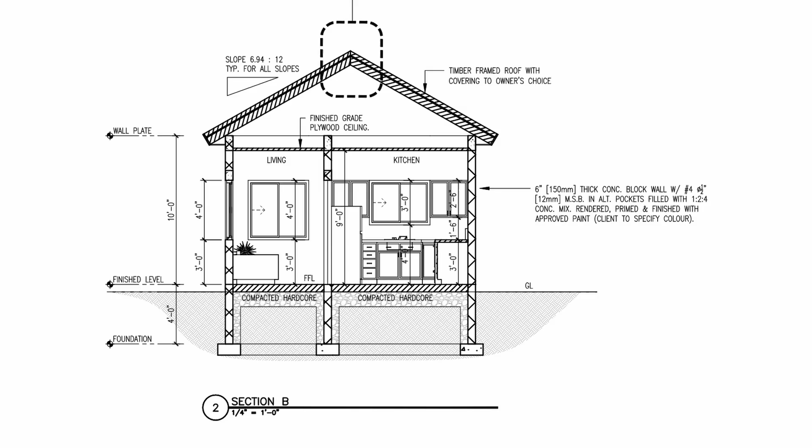So the first step involves developing your visualization and spatial reasoning skills. When you look at drawings like these, it is crucial to be able to read and interpret these documents. Not only that, but also to understand the drafting standards that make the drawings look the way that they do.

These kinds of drawings follow standards that ensure anyone in the industry, no matter where they are in the world, can read them correctly. And so understanding what you see, for example, the relationship between 2D and 3D drawings, the various symbols and annotations, etc., is essential.

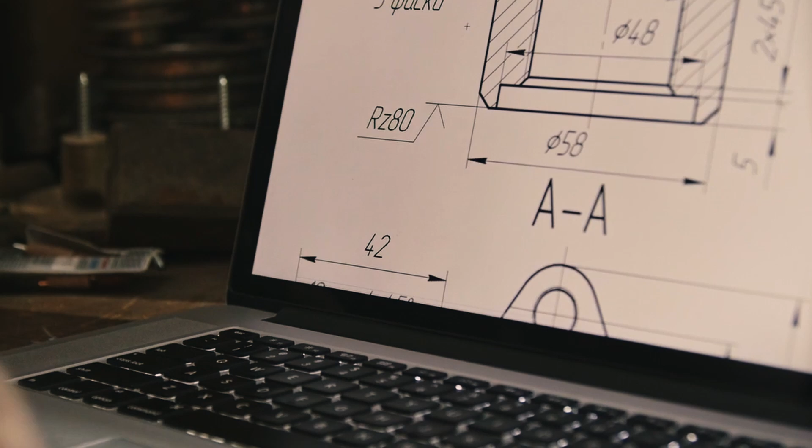Without these fundamental skills, it is difficult to create or even reproduce technical drawings accurately. These skills will help you to translate architectural concepts into precise, accurate CAD drawings.

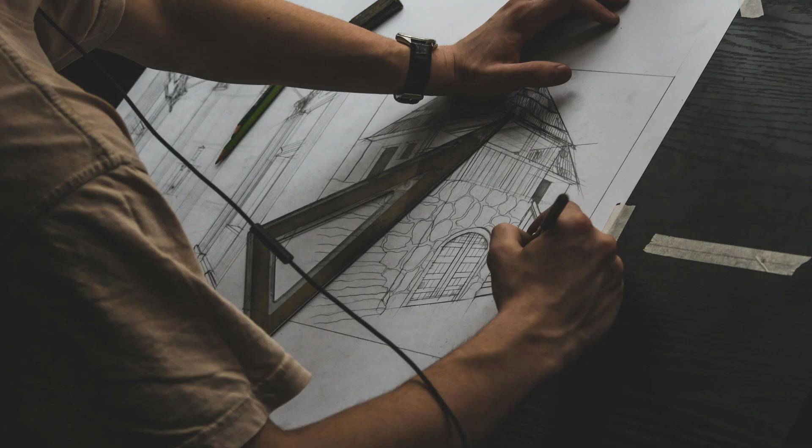Speaking of CAD, CAD stands for Computer Aided Design. Just a few decades ago, we would all be using manual tools to do all of our drafting and designs. However, today there are tons of CAD applications on the market, and these have become our primary tools.

And so mastering the basics is non-negotiable. You must start with a CAD application by learning the user interface, navigation tools, how to move around, how to initiate a project, set up units, and also ensure that coordinate systems are properly configured.

All of these fundamental skills might seem simple, but they are the building blocks of every drawing that you create. And no, the first step isn't tackling the advanced stuff like external references, links, or sheet set managers. Those things are fairly advanced or complex.

However, if I could start over, I would focus on mastering the core drawing modification techniques first. So we're talking about lines, arcs, squares, rectangles, offset, trim, extend. These are tools you'll be using every single day, and so proficiency here will set you apart.

So in drafting, being efficient is like the order of the day. So what's going to happen is over time, you will develop easier and shorter ways of doing things, which is amazing. You'll learn lots of cool shortcuts and start to move much faster as you do your drawings.

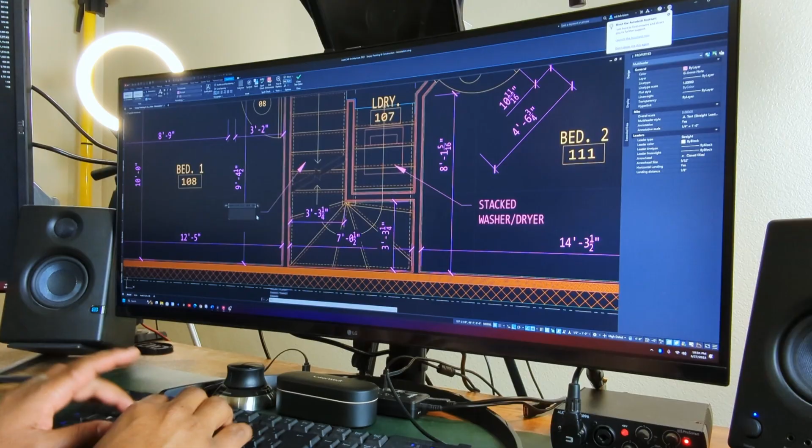Let's talk about annotations, dimensions, and plotting. Your drawings really don't become useful construction documents until they are properly annotated or detailed. Truth be told, you will be doing a lot of this throughout your career, so you gotta gear up.

Yeah, so learn how to add text, dimensions, leaders, and understand how to create layouts and plot your work properly. These final touches will turn your design into what we call ready to build blueprints. And if done properly, you can really make your drawings stand out even above the rest.